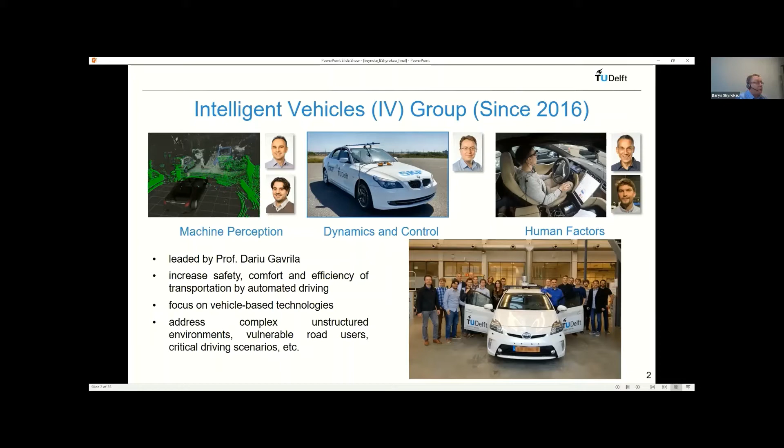The colleagues from human factors focus more on HMI and the driver itself, and also the passenger. We'll talk a bit about this later. In dynamics and control, we mainly consider critical driving scenarios, and also tasks related to control and user acceptability.

Overall, the interaction between these three subgroups gives us the whole pipeline, starting with involvement or non-involvement of the driver in the loop, 3D environment perception, prediction of road users and their behavior, and also communication with the passenger and how to improve driving comfort. In general, you might consider that nowadays automated driving for highway automation is 99% ready if we're talking about normal driving conditions. Of course, in safety critical scenarios, the situation is more difficult.

From the point of environmental perception, this is a screenshot of driving in Delft. You see a lot of pedestrians, cyclists, a bit of chaotic behavior. This makes the challenges for our perception group and their research more important compared with normal highway driving.

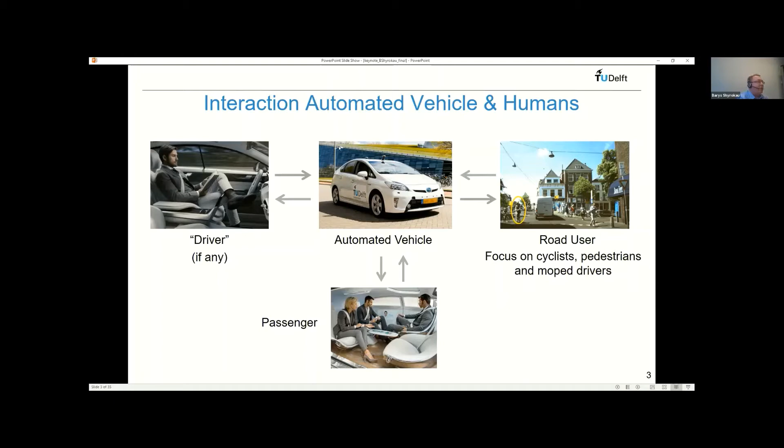In general, when we're talking about automated driving, the key things mentioned here are environmental perception, how we are going to provide feedback to the human, how we will inform outside through external HMI, vehicle-to-vehicle communication, and vehicle-to-infrastructure communication. In this context, energy efficiency and environmental friendliness also become important.

The big topic in general is validation and homologation, especially for higher levels of automation. According to the research, we would need approximately 14.2 billion kilometers to prove that the vehicle is safe, and this is physically impossible to achieve. That's why we observe a lot of mixed simulation and real tests. But as I said before, the primary goal of the talk today is control for safety and comfort.

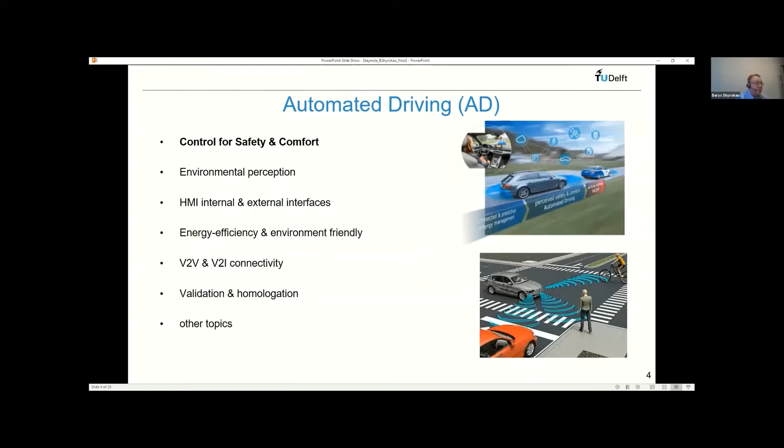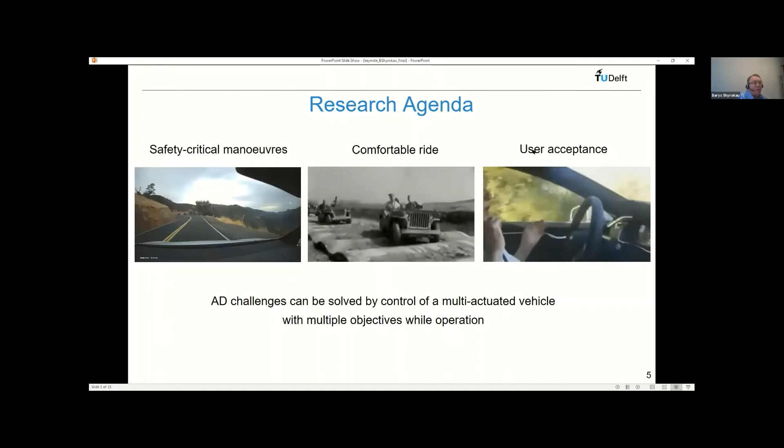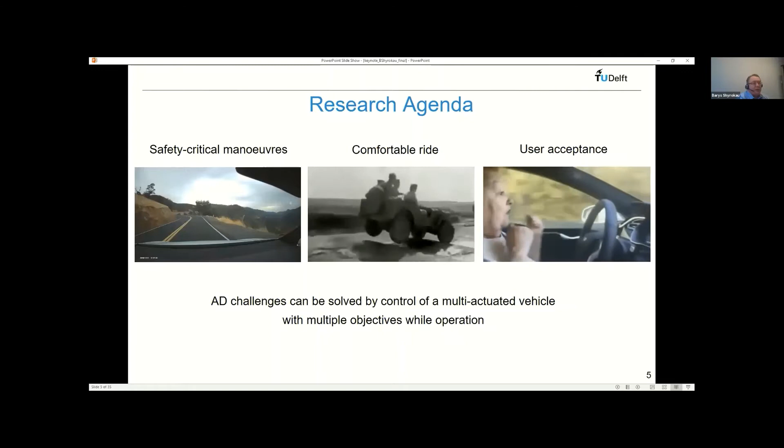This leads us to the research agenda for today. First, we would like to talk about safety critical maneuvers caused by different weather conditions or wrong driving style, then comfortable driving. You might have a vehicle which is driven autonomously, but if its level of comfort is not what you expect, you simply as a customer will not accept it. Also important for level 2 and level 3 automation is interaction with the driver. We believe all these challenges can be addressed by control of multi-actuated vehicles with multiple objectives during operation.

And the final goal, how we see this, is a 6D plus vehicle motion control, using some novel sensor technologies and using as well multi-objective optimization-based control to achieve these goals. What it means, 6D plus, and why plus is there.

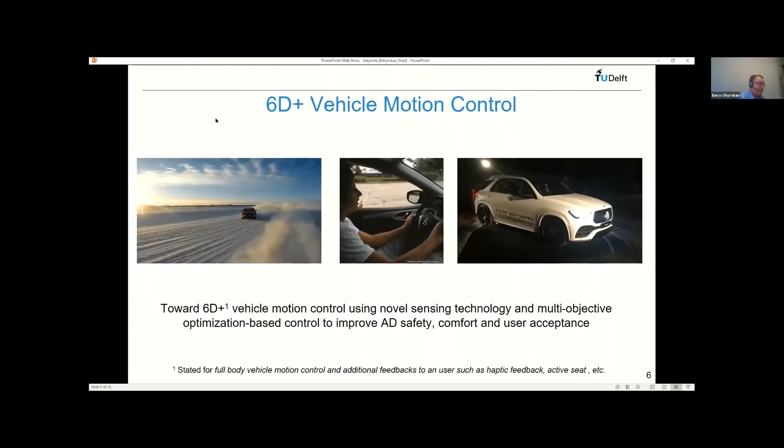In total, we are talking about full body vehicle motion control. We are not only doing the control in the plane, but also involve the body dynamics from the point of vertical motion, roll, pitch. And also we consider some additional feedbacks like haptic feedback or maybe in future active seat. We would like to come up with some framework which will be feasible at the end to implement and cover all these challenges. Let me start with safety-oriented research, and I would like to first discuss sensor technology.

Of course, for example, for the localization and for environmental perception, we nowadays have a good combination like sensor fusion between LiDAR, camera, and radars. Unfortunately, when we're talking about tire-road interactions, all we have until now is wheel encoders, and we can use accelerations of the vehicle.

What we see now in the limitation of safety is that often the motion planning is done based on kinematic models, and these kinematic models don't take into account the interaction between tire and road, which often results in unfeasible planning paths. When we're talking about existing stability systems, there is no direct transition to the automated mode because they were designed for humans, and it means that they don't fully utilize the friction potential that can be achieved.

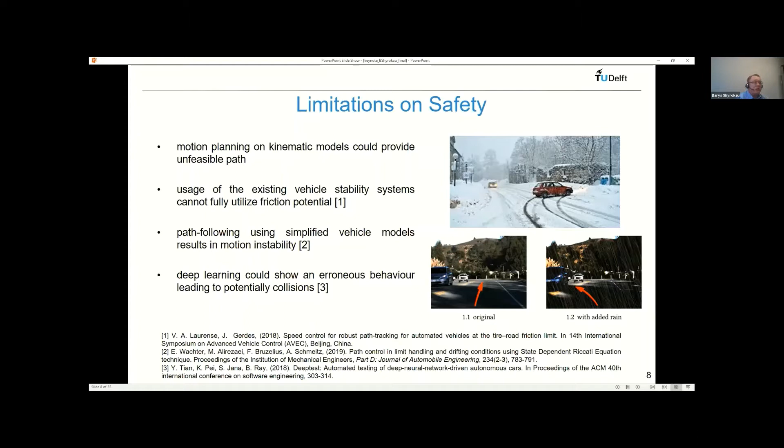The third thing is that when we're talking about path following, very often a simplified vehicle model is used, and at the end, this could be the reason for motion instability. Of course, the hot topic nowadays is deep learning, and we believe that 95%, especially for normal driving conditions, could be covered. However, for safety critical maneuvers, the wrong prediction could lead to potential collisions and accidents.

As I say, we don't have nowadays a sensor which can give us tire-road forces. And together with our bearing manufacturer partner, SKF, we developed a concept called the intelligent bearing, which you can see on the right screen. This is a knuckle and bearing instrumented by strain gauges, and it allows us to accurately reconstruct the tire forces up to 10 Hertz, which is the primary range of vehicle handling and usually the range of interest.

It's commercially feasible. There is also research related to smart tires. They have their own advantages and disadvantages, and the main disadvantage is from the point of operation time: if you change your tires, you need to recalibrate and do the procedure again. And the main thing we see is that it will be a beneficial additional information source for future automated vehicles.

SKF is not the only company who has tried to build such kind of technology for the last two decades. Close by will be Schaeffler from Germany, NTN from Japan, or Iljin from South Korea. There are attempts to build such kind of sensor. And in the past, SKF tried to use an approach to measure the forces and directly map them to the strains measured in the strain gauges.

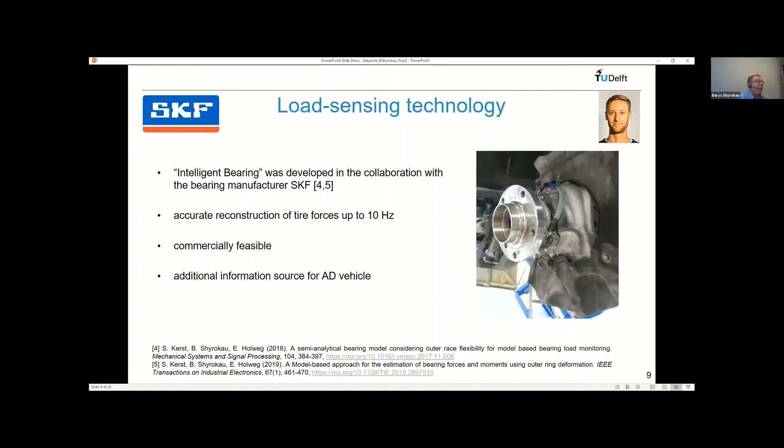The thing is that, of course, instrumenting the bearing with strain gauges, you just glue them. It's not rocket science. Everybody can do this. And in the past, for example, our industrial partner used neural networks, trying to catch direct tire forces and find the magic black box relationship. It was partially successful, but it also raised the question that if you produce any new bearing, you need to do the same procedure. If something changes, you need to do this in the field. You cannot do it in the lab, which increases final costs significantly.

When we started work on this project, as scientists, the first decision was that we don't want to find a magic relationship. We need and want to consider the modeling of the bearing inside the estimator. And the approach taken was a cascade Kalman filtering approach.

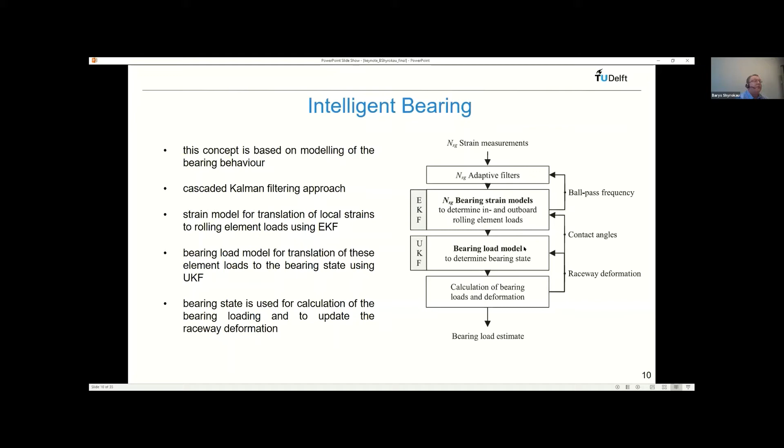We have an extended Kalman filter to translate local strains to the rolling element loads, and to define inboard and outboard rolling element loads. Then we use an unscented Kalman filter for the bearing model to translate it to the bearing states. Based on the bearing state, we can calculate the loads, calculate deformation, and then send information regarding the raceway deformation and contact angles to the filters again.

Here you see an example from one of the field tests, which is called skid pad. The main reason for this test is that we try to push the vehicle to the limits.

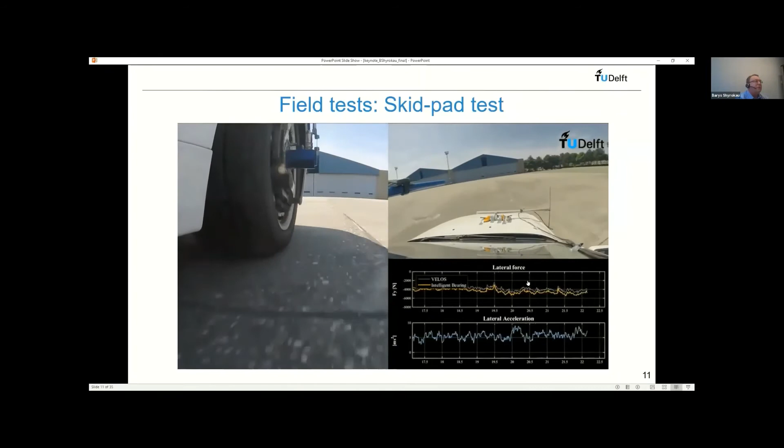And you see the lateral force. The gray one is our ground truth, a wheel force transducer. And the orange one is intelligent bearings. What you see on this photo, this is a wheel force transducer.

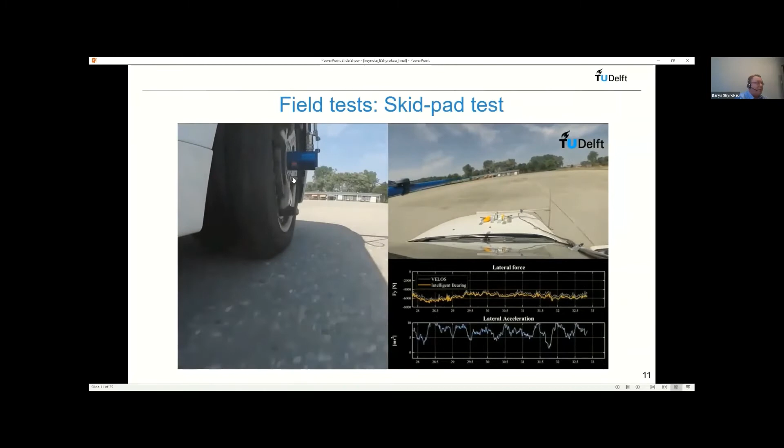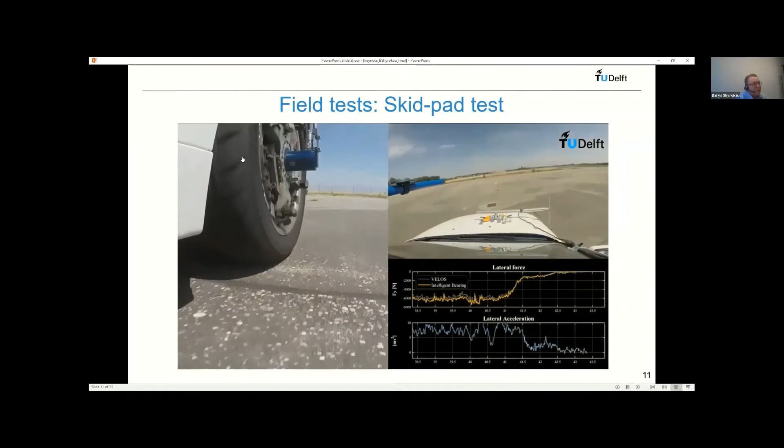The reasonable question will be: okay, why do we need to develop the sensor if we already have such kind of technology, we have a ground truth? The problem is that the price of one such wheel starts, I would say, from 100,000 for one wheel. It means that to have a full vehicle instrumented, plus vehicle costs, I don't think it's a smart idea to pay $500,000 only for this. And we were also limited and considered that we need to develop a system whose total cost should be below 1,000 euro.

And when we perform experiments and analyze them, we also compare with a reference study, which is a pure data-driven approach, in this case, let's say, neural networks. What you see on these plots are the main forces related to longitudinal motion and normal force, as well as the moments, which are commonly used in control. For example, from this moment Mx, you can recalculate lateral force.

What we see is that the approach that was developed provides a good quasi-static load estimation, and also reasonably good estimation in the case of fast transient maneuvers. There are, of course, some things for further improvement related to underestimation of vertical forces, for example. However, at the same time, when we compare with the reference study, we clearly saw that the pure data-driven approach shows considerable errors compared with the proposed one.

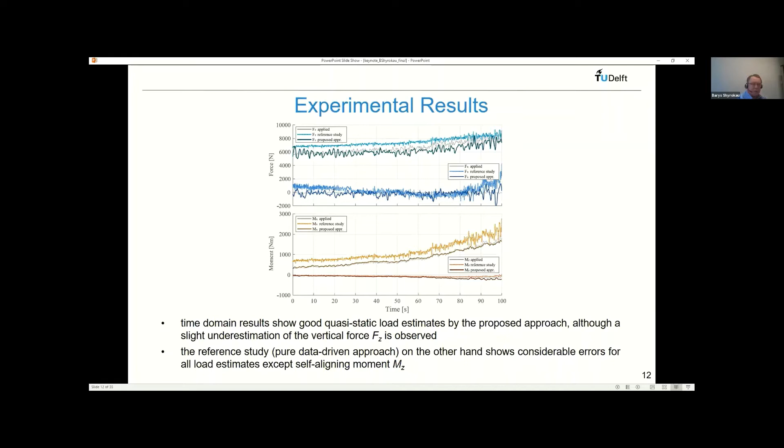But after this, the project went back to our industrial partner for product development, and we of course wanted not only to develop the sensor and the estimator behind it, but also to see its influence on vehicle motion control. The step taken for this, in collaboration with Toyota, was based on the classical example, wheel slip control, anti-lock brake system: how we can develop a more proactive controller using, in this case, nonlinear MPC, assuming that this wheel load information is available.

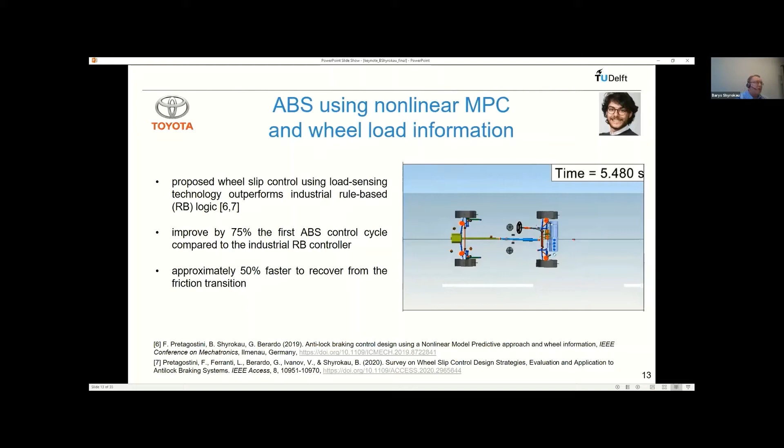In this case, we took the estimation errors we have from our sensor, along with sensor noise, incorporated them in the simulation environment, and compared with an industrial rule-based controller from one of the tier 1 suppliers for Toyota. What we saw is that for the first ABS cycle, which is the most challenging, I would say, we had approximately 75% improvement. And also in the case of the friction transition, the recovery was much higher.

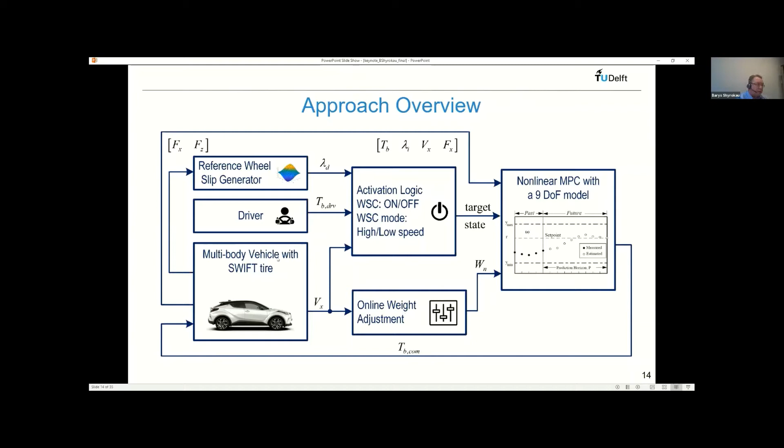Briefly explaining the approach behind this: we use a 9 degree of freedom vehicle model incorporated in an MPC framework, and activation logic, because you would like to have a transition between systems and take into account driver input. An adaptation scheme, mainly because the performance of wheel slip control depends significantly on the wheel dynamics, and at low speed you need to modify it. A reference generator, where you see we have a mix of classical slip control with some additional force information to make the problem less computationally complex, and it was validated with a high-end vehicle simulator model at Toyota.

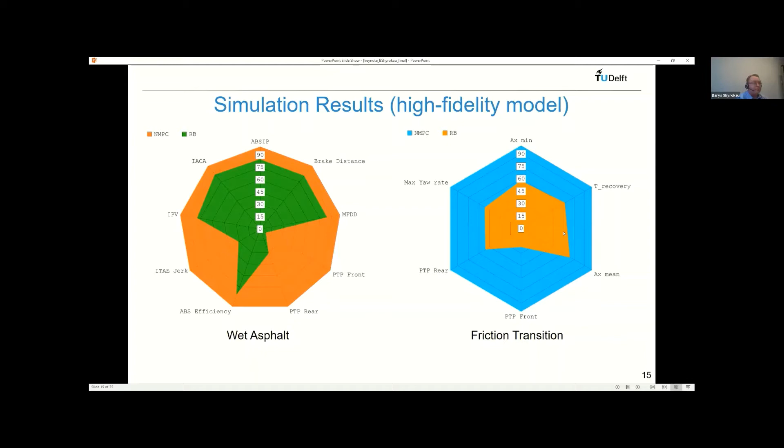When we compare the results here, there are two examples presented as spider plots: one for wet asphalt, another for friction transitions. These are the main KPIs commonly used to assess the performance of such systems. The brake distance is the most intuitive, and 100% means the best, and then it's going to reduction. What you see here is that the rule-based logic from the tier 1 supplier performs much worse, especially for some KPIs, and also in the friction transition, which is quite a challenging scenario for rule-based logic. The performance is much lower compared with the proposed approach.

Then, taking the step further, we started to think about lateral motion and how we can benefit automated driving in evasive cases. For this, the controller was developed taking into account two actions, so that you can steer and brake. Usually, if you have an obstacle, you try to brake, but beyond a certain point at high speed, there is no longer any opportunity to avoid collision, and you need to steer.

The controller took into account the limits of the tire and the vehicle, considered requirements regarding force distribution, and also took into account actuator dynamics, not assuming but checking that it's real-time feasible. And the robustness was intensively investigated with respect to variation of external disturbances and parameter uncertainties.

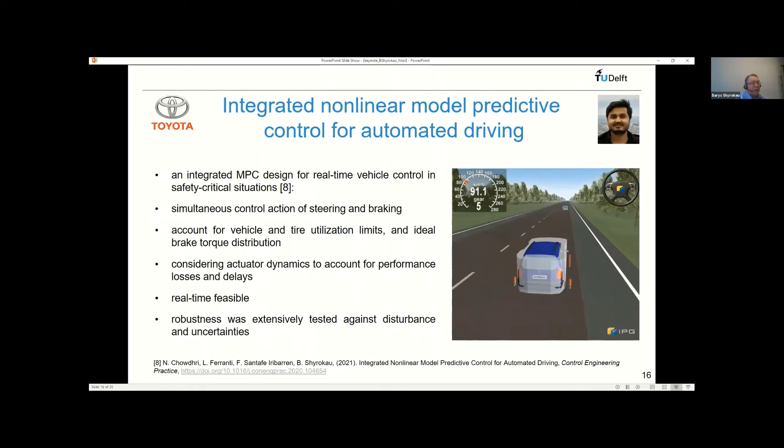What we compared: the last one, what was proposed, which includes a four-wheel vehicle model with 15 states and non-linear tire behavior, was compared with something more common in the literature, a non-linear bicycle model with non-linear tire, and also with an example which we know will perform badly but is often used in the literature, a linear bicycle model with linear tire.

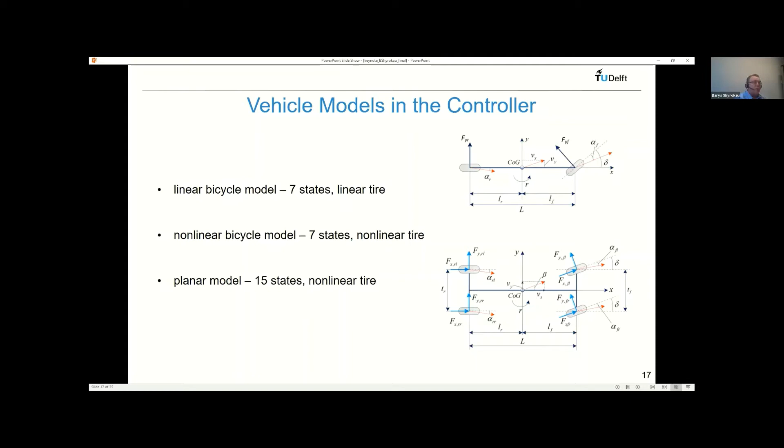And as I said, again, here are simulation results, but these simulation results were performed in soft real time and take into account that the controller should not overrun. What we clearly saw is that the proposed integrated controller, as expected, significantly outperforms linear MPC. Here you see lateral displacement in time domain and also yaw rate. And we clearly see that the simple one has significant overshoot.

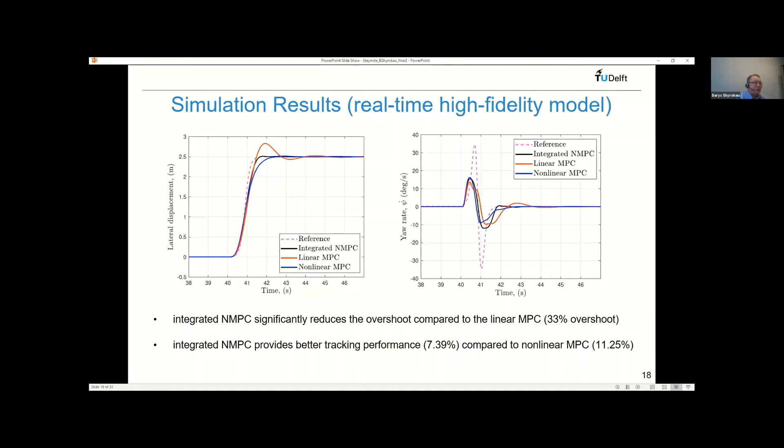And compared with nonlinear MPC, the benefit is less. We don't have overshooting, which is a good thing. However, we have delays. And with both actions, steering and braking, we can achieve more precise tracking.

Now I would like to shift to the comfort-oriented research. And first, I would like to quickly discuss current limitations or some potential extensions we might have if we are talking about comfort of automated driving. Of course, for many years we already have constrained accelerations in our ADAS systems. In any modern vehicle you have constraints regarding the acceleration the system will achieve, and then it will shut down, if we are talking about cooperative cruise control.

Now the trend is to implement also adaptive jerk constraints. For example, we have a scenario of lane change, and in this study, at least, there was an investigation of what will be the preferable driving style for automated vehicles based on a certain amount of participants, and it's a more heuristic approach.

And the last thing, which I already mentioned in the beginning, is that these two things, path control and vehicle body control, are isolated and not coupled. They are controlled by two controllers, and usually in industry rule-based logic is applied to synchronize them, but they are not presented in one framework, which leads to, let's say, suboptimal performance.

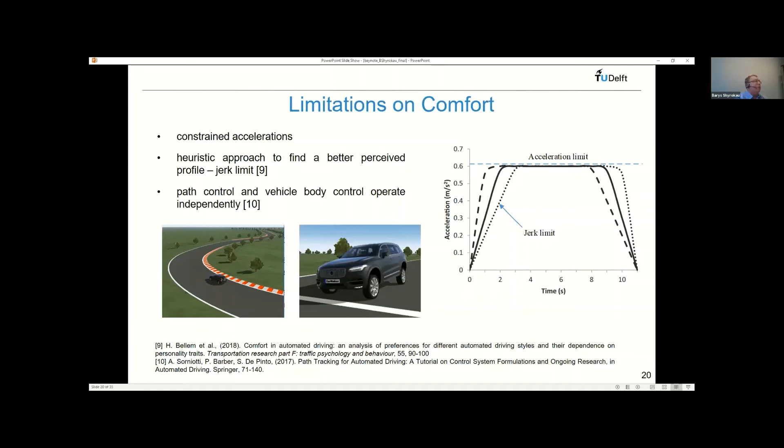I would like to keep your attention now on the vehicle which is driving. First, what you can recognize is that usually when you drive your vehicle in the corner, the body inclines out of the corner. And in this case, you see that it's clearly diving into the corner. This is possible to achieve thanks to active suspension. And in this work for comfort-oriented motion control, we collaborate with one of the leading suspension manufacturers, Tenneco.

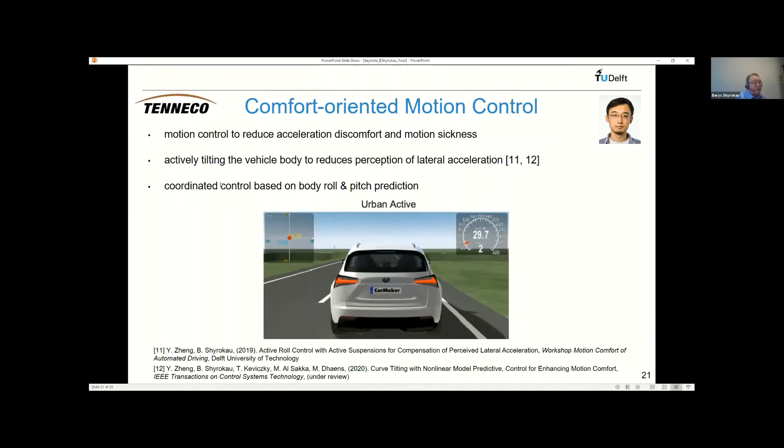And the goal is that we would like to reduce, first, acceleration discomfort, meaning discomfort caused by a high level of acceleration that you perceive as a human being. And we would like to focus also on motion sickness, which is a significant problem for automated vehicles in the future. The idea, as you already recognize, is like riding your bicycle or driving your motorcycle. You try to incline in the corner to reduce the amount of acceleration you perceive due to the G-force. And for this, you need to do some coordinated control.

How do we realize this? In the current development, we have a preview-based reference generator; nowadays we have such systems, curvature preview in the vehicle for automation. And based on this, it generates a reference roll angle. The first solution was to put everything in a nice nonlinear MPC framework, but the model is so complex that it simply ran out of real time. And since we are working with industrial partners, hard real time is a really strict requirement for us, because the final goal is that it needs to be tested on the real vehicle.

The solution we came up with: we solve the optimization problem explicitly using explicit MPC, and we use this explicit MPC as an initial guess, a smart guess, for nonlinear MPC. This combination helped us achieve hard real-time performance. Then the further step, due to COVID, unfortunately didn't happen this year but will happen at the beginning of next year: testing on the real vehicle. And the next step we are taking is incorporating this in the motion planner and combining it with the path following control.

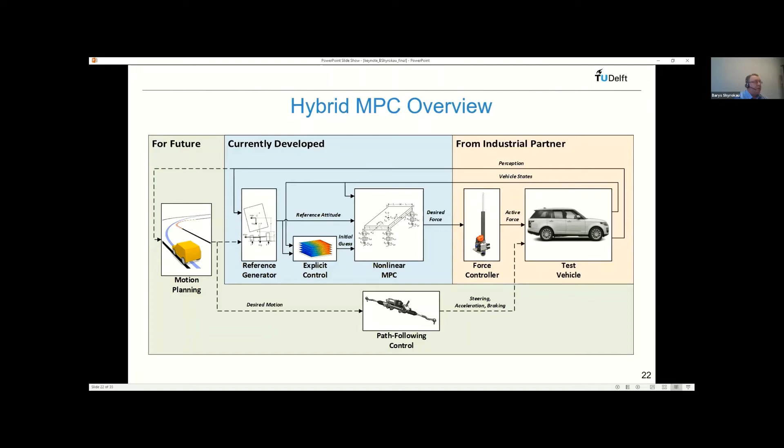For now, how it was evaluated: you see that the whole controller is running on 20 Hz in the rapid prototyping platform MicroAutoBox. It communicates with the full vehicle model, a validated vehicle model with actuator dynamics, which is running on another dSPACE machine, much more powerful, at 1 kHz. Then it communicates to the motion platform, which generates the motion of the mockup.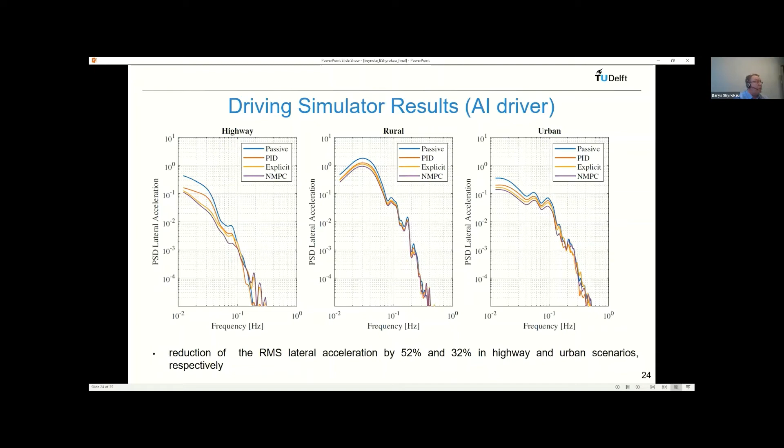And now we are coming to the point when I would like to tackle user acceptance, and we already had some discussions in the previous lectures regarding haptic control, and we also strongly believe that at least for the next several decades, we will still not fully have all SAE level 5 automated vehicles. I would say we are now here and we see more introduction of SAE 4 vehicles, which perfectly run on the proving grounds.

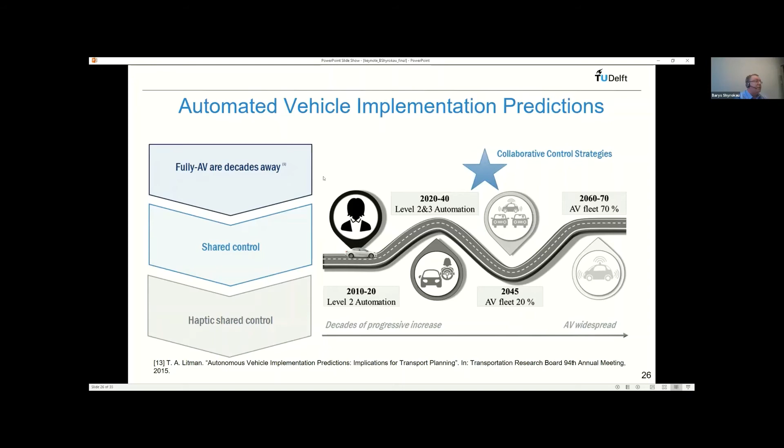However, taking into account the fleet, some predictions for 2045 say we will have only 20% of automated vehicles in the fleet in Europe. Which means that another 80% will still be in the level 2, level 3 transitions. And we would like to improve the current ADAS systems when the human still can act and take control, or ideally work together with the AI.

And in this case, we are talking about collaborative driving, and this work is done in cooperation with the University of Cambridge, with Professor David Cole and his team, and also with our industrial partner, Toyota. The idea is that we have a driver, we have some ADAS systems, we have a closed loop man-machine interface, and they both contribute to the vehicle driving.

If we're talking about literature, there is a lot of research related to driver models, and what we find very interesting is the work performed in Cambridge on their driver model, because it can accurately predict steering torque, and it also captures driver variability. This was the reason to go to this model and incorporate this part of the model as a cognitive function and muscle dynamics into the MPC framework for shared haptic steering control. And then we wanted to compare with the state-of-the-art system which is used in Toyota, both subjectively and objectively.

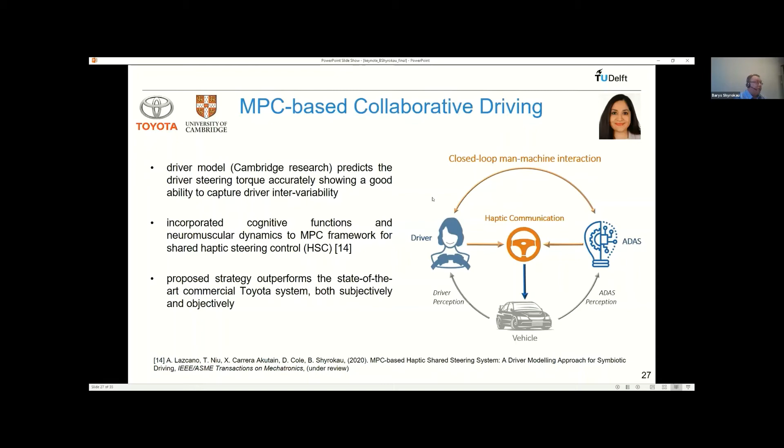How we did this: as I said, the driver model was incorporated in the MPC framework. This was not enough, so we wanted to extend this, and we came up with an adaptation optimization algorithm to change the weighting in MPC for better adaptation to the driver style. And both controller and participants control the vehicle, feedback is provided by control loading, and it's going to the driving simulator.

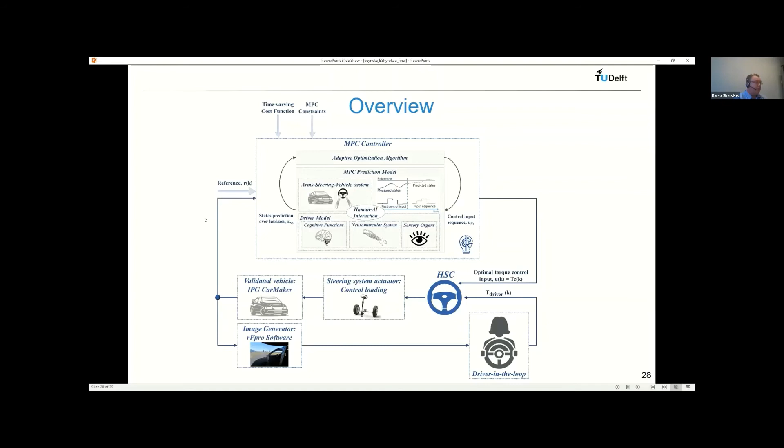In this case, the simulator was fixed-base, but also the maneuvers considered were more like normal highway driving, when you don't expect a lot of contribution from the motion platform. The motion platform is not needed in this case. And I would like first to discuss subjective results.

You see that we performed a questionnaire regarding the overall steering effort, path tracking performance, whether the system was collaborative or not, how smooth the control was, and the feeling of being in control, which is very important for the human being. The green one is the ideal range. The baseline in this case is the state-of-the-art commercial system, which is currently in Toyota vehicles, the blue one. Standard means that this is MPC incorporating the driver model.

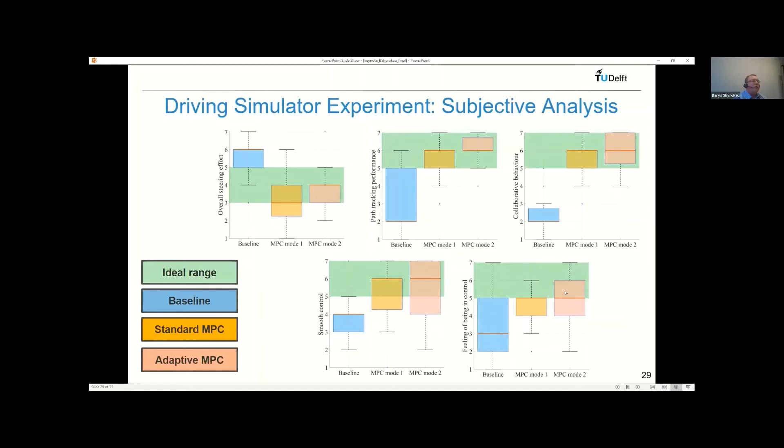And the last one, what was proposed and what was implemented with additional adaptation to better reflect on the personalization and driving style. And as you might recognize, for all of the subjective questions we addressed, we outperform baseline for sure, and in general we're in the target range. When we later look at the objective key performance indicators presented here, I will show only two of them. First is lateral error deviation, and the second one is a collaboration ratio.

If you're interested in more of the KPIs, the paper will come soon, approximately in 2 months it will be published. It's in the final round of review. And we clearly see that the reduction of the lateral error is significant. Compared with MPCs and baseline, we can reduce it up to 36%, and we also can significantly increase the collaboration ratio up to 63%. This was done on a pool of 19 drivers, which is quite representative.

And now the step further that is taken is adaptation and implementation for the real vehicle, and we hope to perform the same experiments to show it on the real car as well.

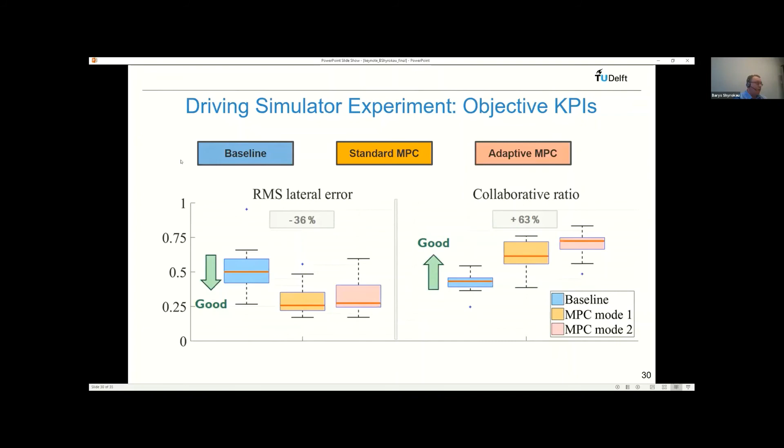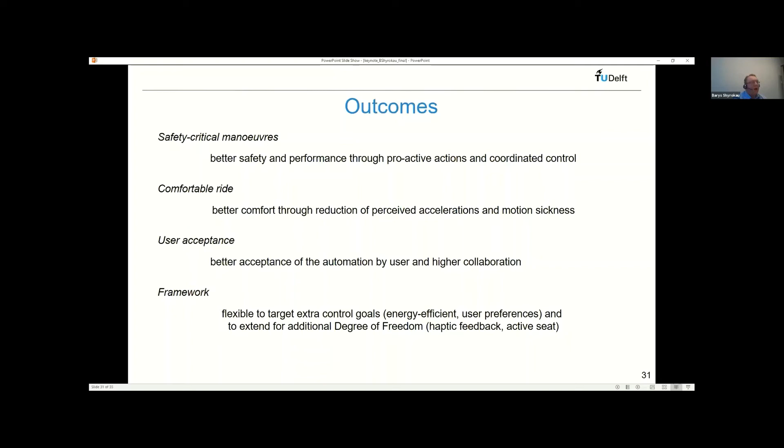Then some outcomes from what we discussed. For safety critical maneuvers, we are targeting better safety thanks to proactive actions, coordinated control, and new sensor technology. To achieve a comfortable ride, we wanted to reduce the perceived acceleration and specifically target motion sickness. For user acceptance, we believe that it's needed for high level automation, and the collaboration needs to be increased. And the overall framework is flexible to implement additional functions regarding energy efficiency and also additional degrees of freedom.

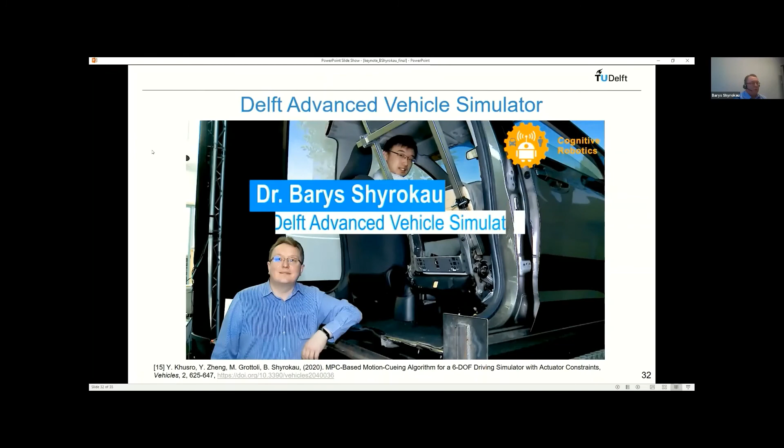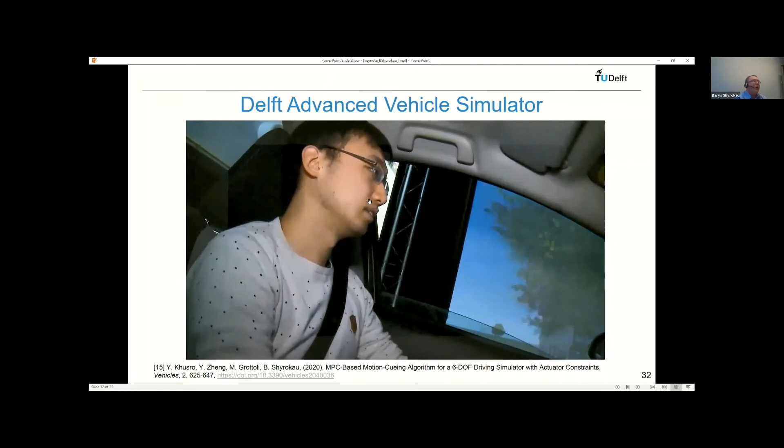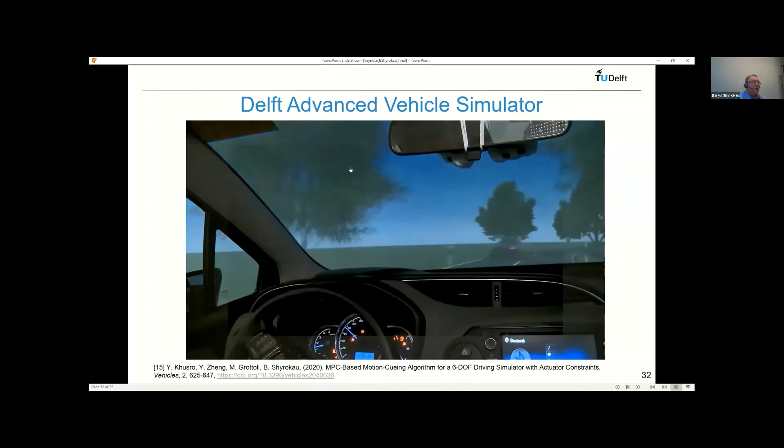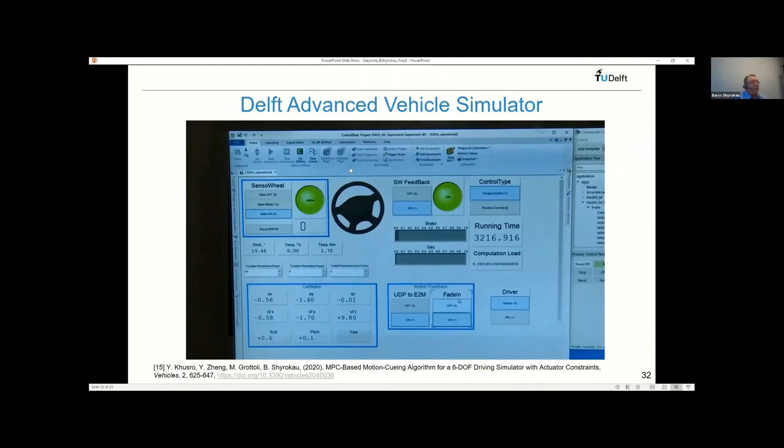I also would like to take a chance to explain a bit our in-house activities. This driving simulator was developed in our group, and it consists of a Stewart platform, a mock-up and a visualization system. We perform 4 different directions of investigation on it, related to critical safety-oriented scenarios, comfort, biomechanical studies, and human-machine interaction. And now we are also starting to look more into motion cueing, how to improve this.

And a quick overview of the ongoing research projects. For comfort-oriented motion control, we're mainly working in this project with our industrial partner, and we would like to come up with better comfort for automated driving.

We started several projects recently for the next step regarding load sensing technology, this new technology developed with a bearing manufacturer. We now move into the phase where we have a project to incorporate this technology in evasive maneuvers for automated vehicles, and see in the next 4 years what kind of real benefits we can achieve. Thanks that we have on board Volvo Cars and Toyota to support us, also Siemens.

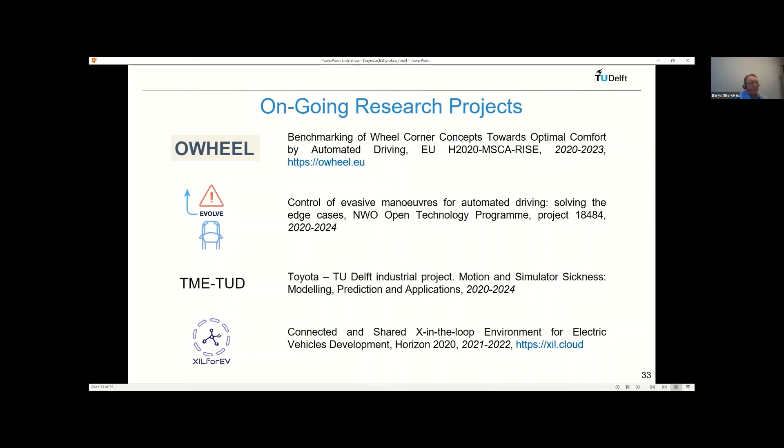And we have an internal industrial project with Toyota regarding motion sickness and specifically simulator sickness, to look at how we can extend and how we can solve potential problems related to motion sickness in motion planning. And the last is more focused on electric vehicles, but at the same time, it gives us some support where we can investigate up to what level our current driving simulator can be used to investigate things related to comfort and specifically motion sickness as well.